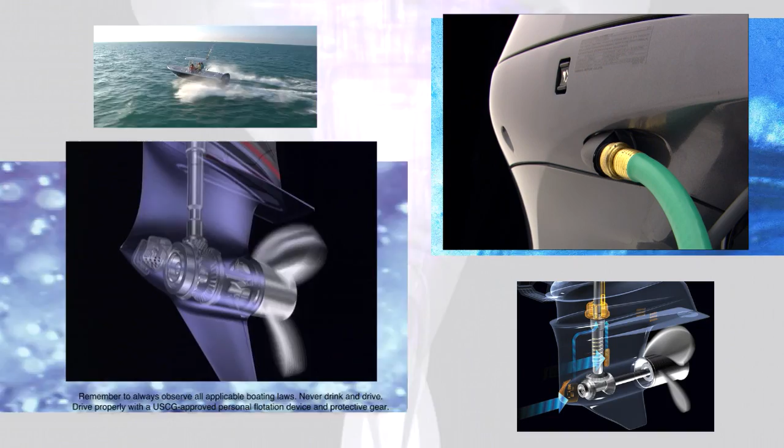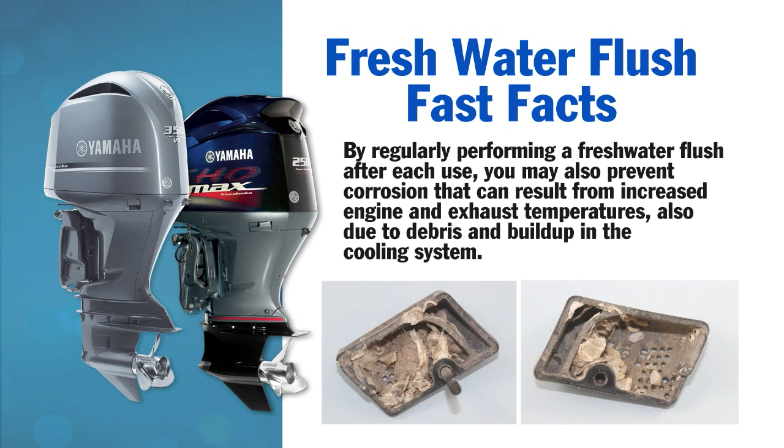Freshwater flushing is one of the most important things you can do to take care of your outboard. It's easy to do, and by going through just a few simple steps, you can make sure your outboard's water pump and cooling system don't suffer from damage caused by debris accumulating in the cooling passages. By regularly performing a freshwater flush after each use, you may also prevent corrosion from increased engine and exhaust temperatures due to debris and buildup in the cooling system.

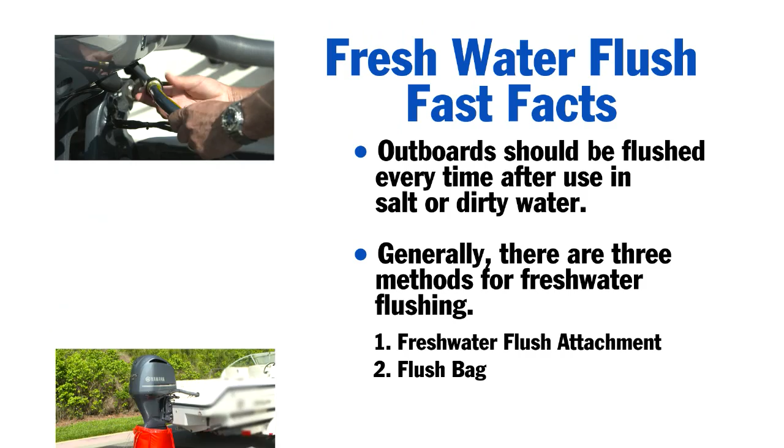Outboards should be flushed every time after use in salt or dirty water. Generally, there are three methods for freshwater flushing: a flush attachment, a flush bag, or flush muffs. The first option is to use a built-in flushing device, which is a hose fitting usually located near the lower rear cowling.

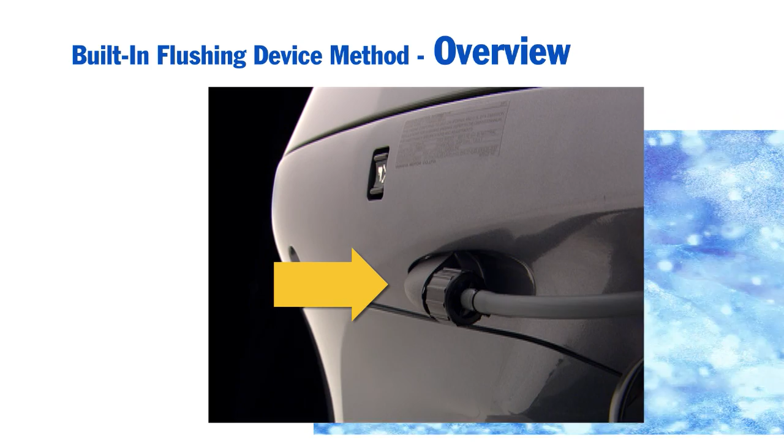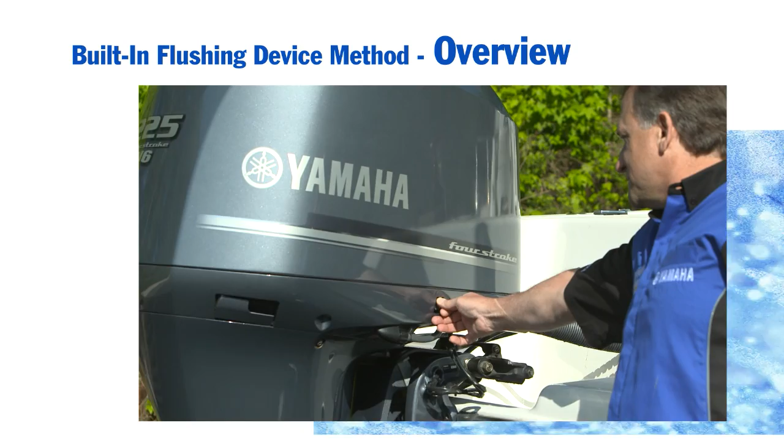During this procedure, you will not run the engine. You can use the built-in device to flush your outboard either on a lift or in the water, but it works best if you can trim the engine up so the gearcase is completely out of the water.

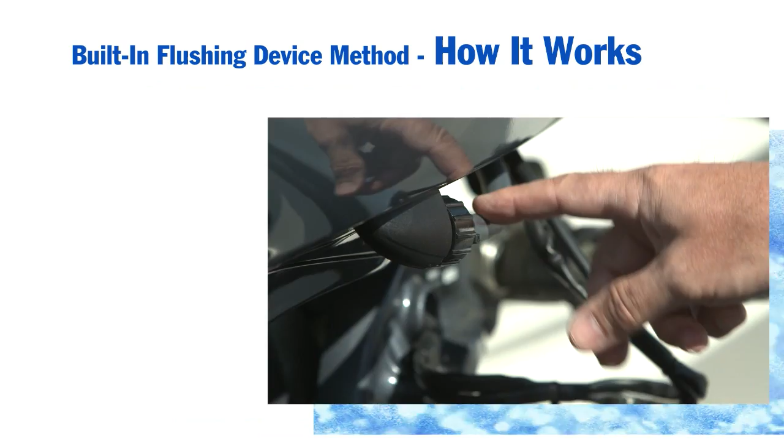Here's how to use a built-in flushing device to perform a freshwater flush: 1. Connect a garden hose to the fitting on your outboard's flushing device. 2. Turn on the faucet and let fresh water run through the outboard for 10 to 15 minutes. 3. Turn off the faucet and disconnect the hose. 4. Put the cap back on the engine's flushing device.

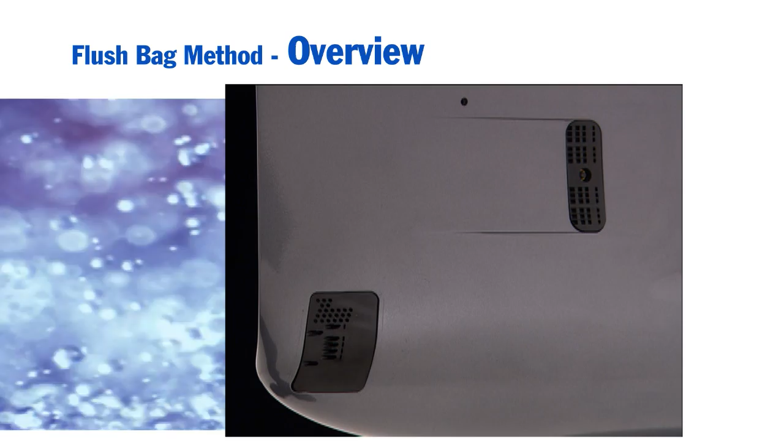Another method to use is a flush bag. Flush bags are sturdy, collapsible bags that fit under the lower unit of the outboard and fill with water. Outboards with more than one inlet on each side of the lower unit should be flushed using this method. Be aware that there are different bag designs, and some are intended to be used with the boat moored. You should always use a flush bag with the boat on a trailer or lift.

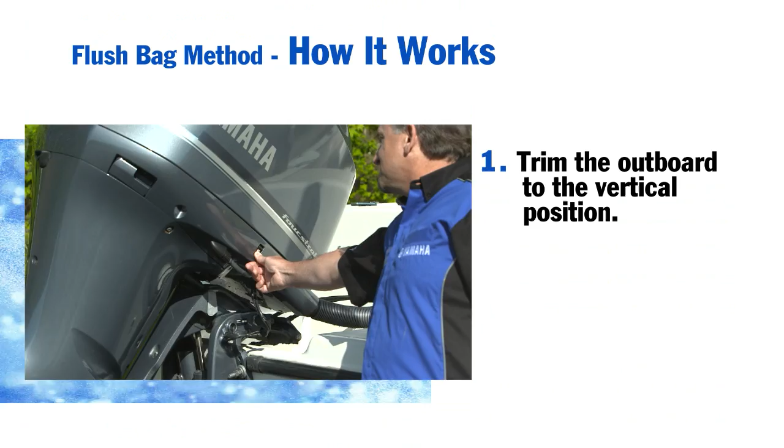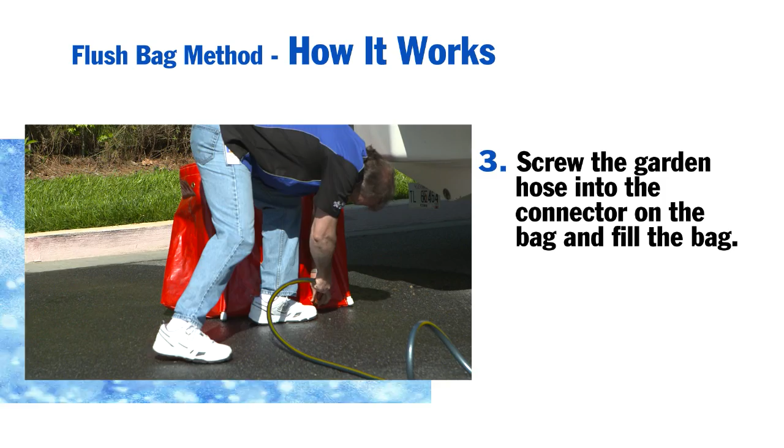Here's how to use a flush bag: Trim the outboard to the vertical position. Remove the propeller. Screw the garden hose into the connector on the bag. Turn on the water and fill the bag. Make sure the water level is as high as possible above the cooling water inlets on the lower unit. This will assure that the water pump is completely submerged.

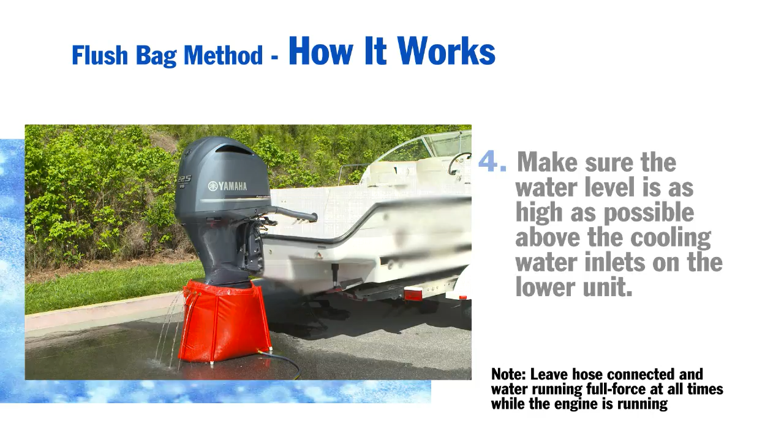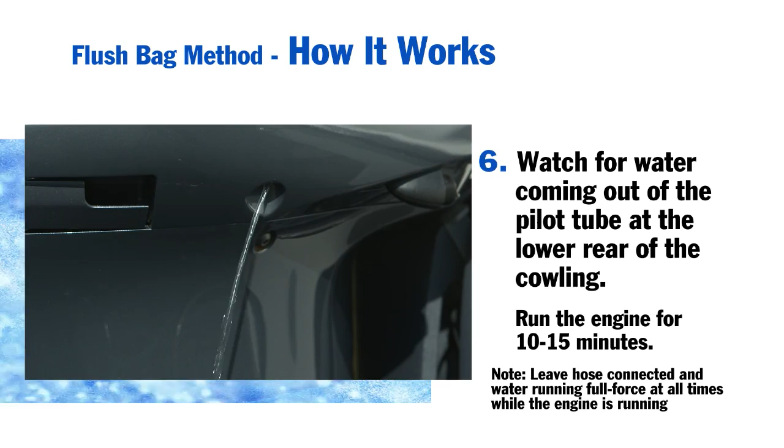Start the outboard and set the throttle to no more than a fast idle, about 800 to 900 RPM max. Watch for water coming out of the pilot tube at the lower rear of the cowling. Remember, it may take 20 to 30 seconds to fill the water passages before water will exit the pilot tube. Run the engine for 10 to 15 minutes. Stop the engine and then turn off the faucet.

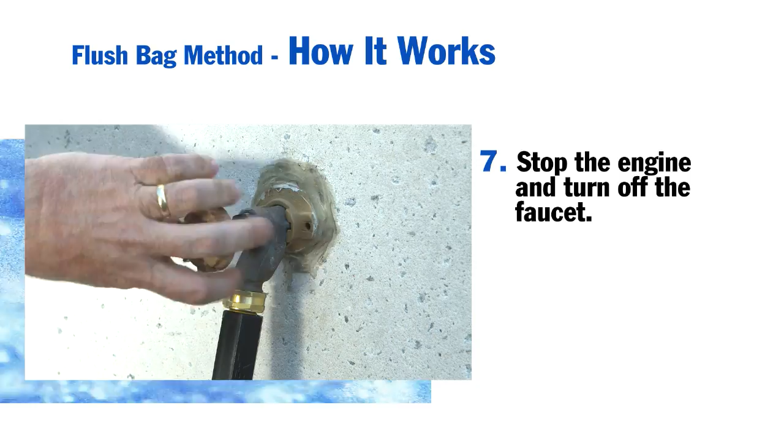Very easy, but there are a few things you need to remember. Never run the engine without cooling water. Running the outboard with little or no cooling water will cause expensive overheating damage in a very short period of time. Turn the fresh water on before starting the engine and turn the water off after stopping the engine. Be sure to add water to the flush bag while the motor is running to maintain the maximum water level at all times, and never leave an outboard unattended while it is running.

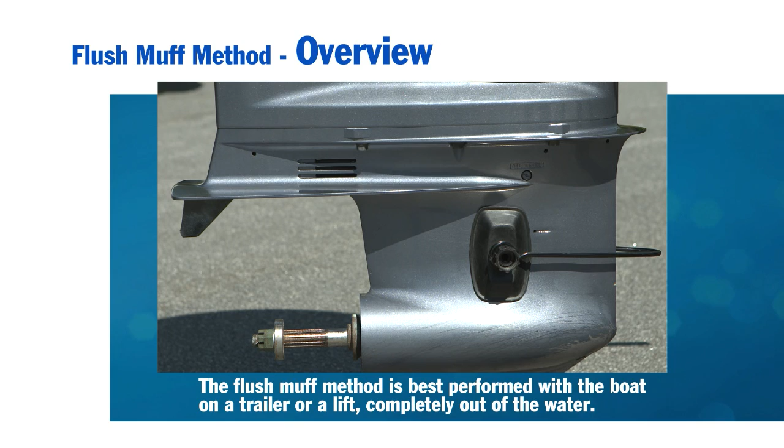The third method works well for flushing lower units with a single pair of water inlets: the flush muffs method. Flush muffs are rubber cups that fit over the water inlets on the gearcase. One of the cups has a hose fitting. When you use a flush muff, you need to run the engine, but only after the garden hose is in place and the water is running. The flush muff method is best performed with the boat on a trailer or a lift, completely out of the water.

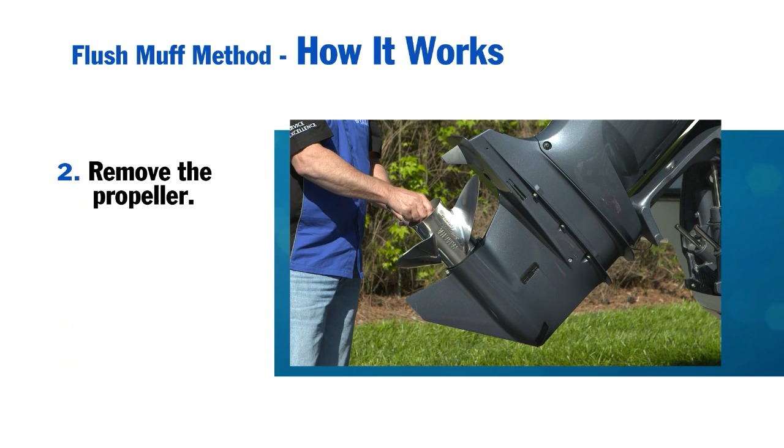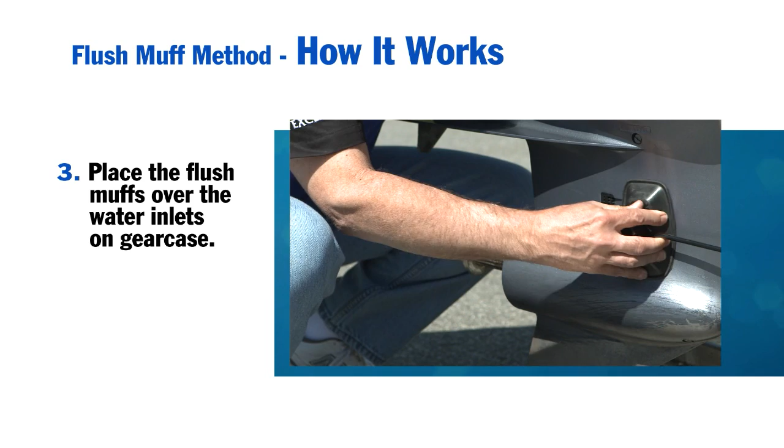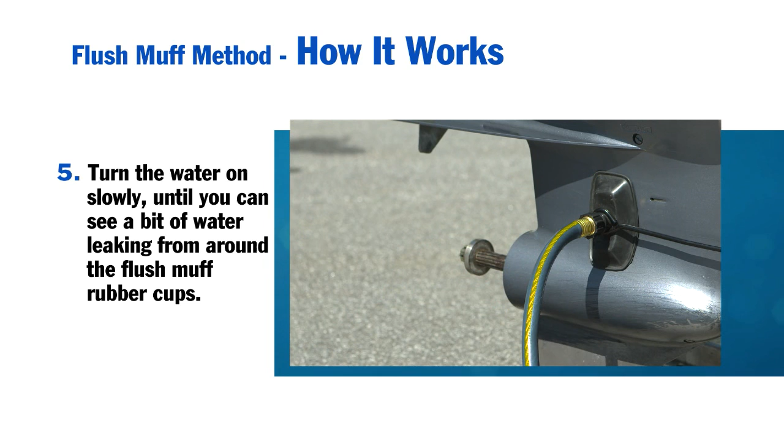Here's how to use flush muffs: 1. Trim the outboard to the vertical position. 2. Remove the propeller. 3. Place the flush muffs over the water inlets on the gearcase. 4. Screw the garden hose onto the flush muff connector. 5. Turn the water on slowly until you can see a bit of water leaking from around the rubber cups. 6. Check to ensure the rubber cups are still in place over the inlets.

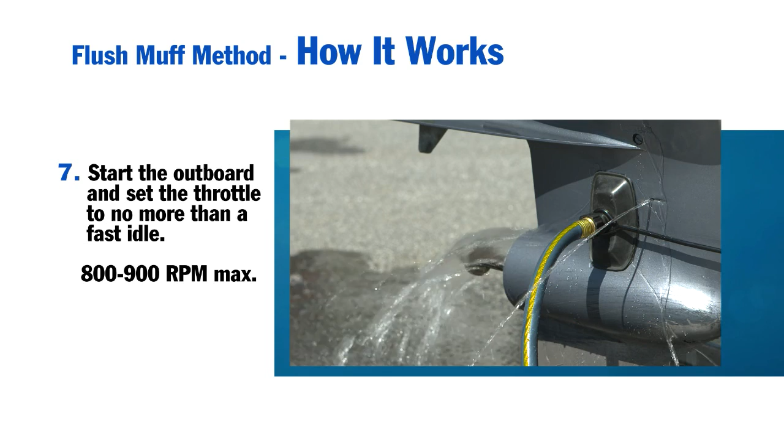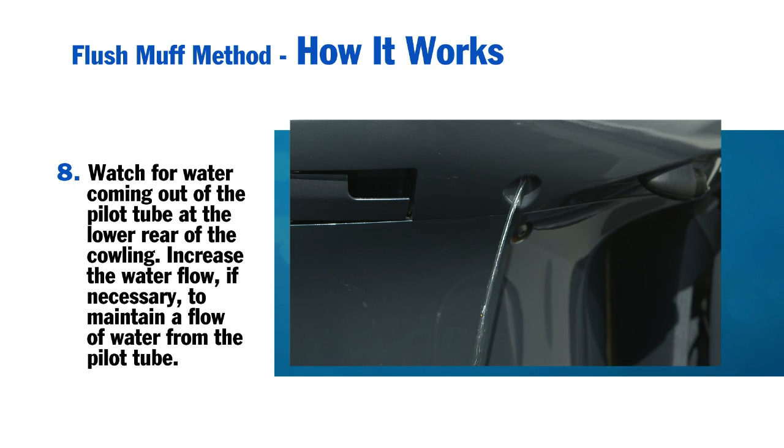7. Start the outboard and set the throttle to no more than a fast idle, around 800 to 900 RPM. 8. Watch for water coming out of the pilot tube at the lower rear of the cowling. Increase the water flow if necessary to maintain a flow of water from the pilot tube. Keep in mind it may take 20 to 30 seconds to fill the water passages before water will exit the pilot tube. 9. Run the engine for 10 to 15 minutes. 10. There should be some water exiting the back of the gear case through the exhaust.

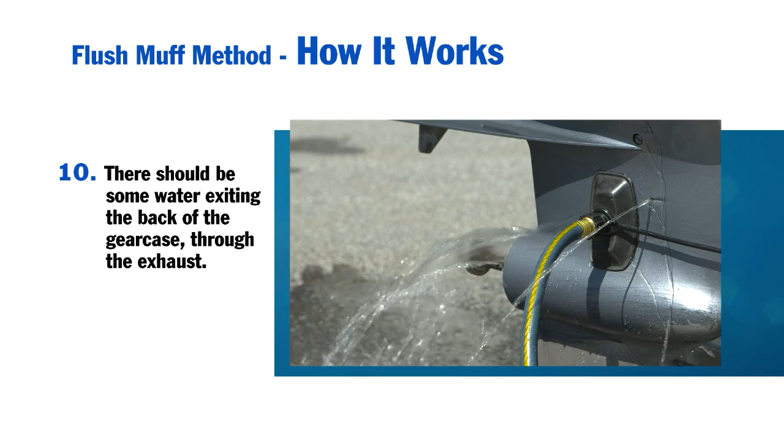11. Stop the engine and then turn off the faucet. Remember, never run the engine without cooling water. Running the outboard with little or no cooling water will cause expensive overheating damage in a very short period of time. Turn the fresh water on before starting the engine, and turn the water off after stopping the engine. Never leave an outboard unattended while it is running.

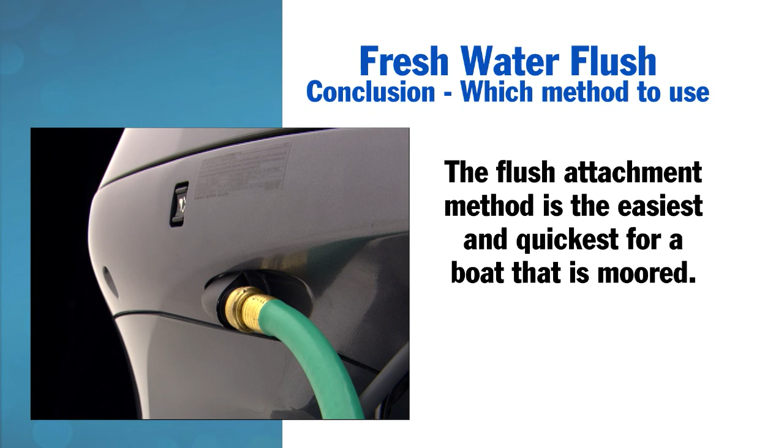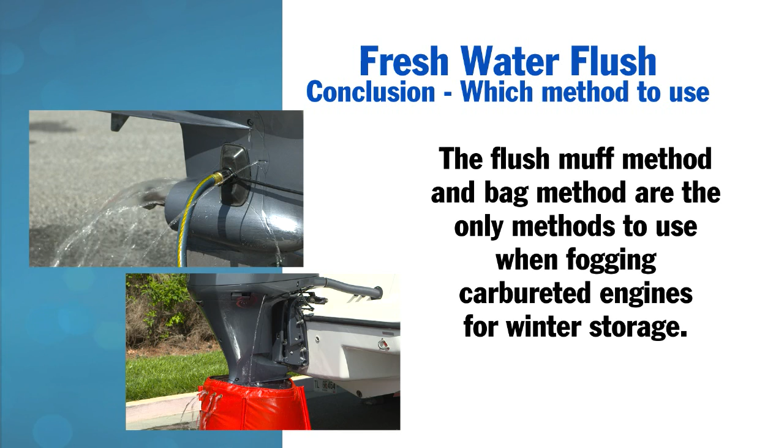There is no single best method for flushing an outboard motor. If you're trying to decide which method to use, just examine your circumstances. The flush attachment method is easiest and quickest for a boat that is moored. The flush bag method is particularly useful on motors with multiple inlets per side. The flush muff method and the bag method are the only methods to use when fogging carbureted engines for winter storage. What is important is to regularly check that the water inlet screens on the lower unit are clear and clean.

Flushing your outboard with fresh water on a regular basis can go a long way toward extending the outboard's lifespan, especially for those who boat in salt water. Freshwater flushing is easy and cheap, and it's one of the most important things you can do to help maintain the life of your outboard, so keep the garden hose handy.